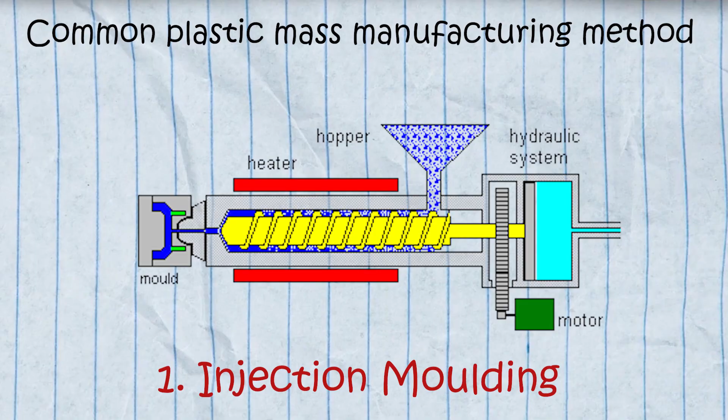Now if you look at plastics or polymers, on the other hand, the most common example you could give for plastic manufacturing would be injection molding. Study up on injection molding because you will be asked about this during your interviews. So study up, it's good to know. Another one would be blow molding. Thermoforming is also a pretty good thing to study because you might be asked about it too - I was personally asked about it. Other concepts such as rotational molding, and finally the most infamous one, additive manufacturing, aka 3D printing.

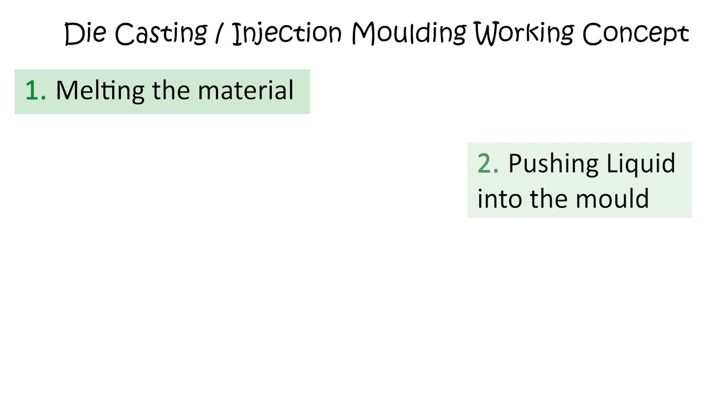Die casting versus injection molding. The concept of manufacturing is relatively the same here. You start off by melting a certain material and then pushing it inside a cavity or a mold using a piston or a high pressure pusher, and you fill the cavity up to a point where it's pressurized inside, and then you let it cool and solidify. Once it's cooled and solidified, you open up your mold and take the piece out - you just extract it using a plier, pull it out, if you may. And that's kind of the idea between die casting and injection molding.

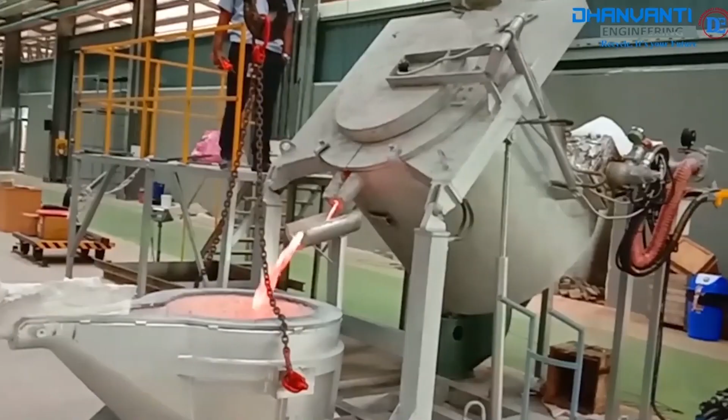So what is the difference then? The most obvious difference between both these manufacturing techniques is the material used. In die casting, you use metals, and in injection molding, you use plastics. In die casting, you take your solid metal, send it into a furnace, melt it out to get liquid, and then send it into your cavity to solidify. In injection molding, the idea is the same, but you have plastic pellets instead, which are first melted in a barrel, and then the liquid plastic is sent into a cavity, which is then solidified. So if you think about it from face value, the concept of manufacturing between die casting and injection molding is the same - it's just that the material used is different.

So I was asked this question during my first ever engineering interview for a full-time job. I remember the interviewer asked me this question. She said, 'What do you know about FMEA and DFMEA?' And I think I'd studied about it, but I blanked out when she asked me, and I had no idea what she was saying. It was very awkward and embarrassing, and I just looked at her face like, 'What the hell did you say to me?' Yeah, that was pretty embarrassing.

So what is FMEA? Failure modes and effect analysis. It's a systematic methodology commonly used in product development and manufacturing. Using FMEA, you can identify and analyze potential failures and proactively find solutions to it before it actually becomes a real thing and you lose a lot of money.

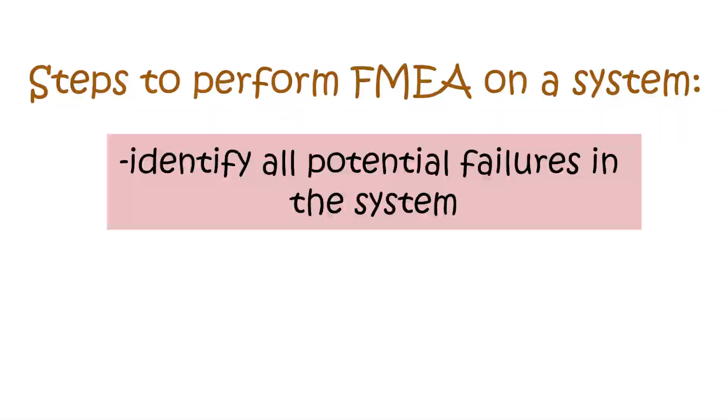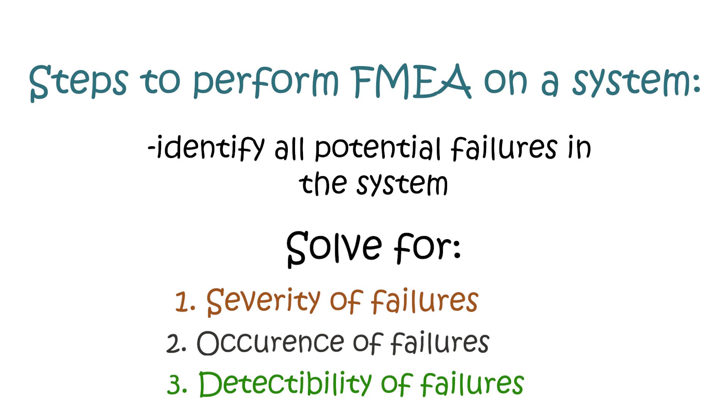So let's say you were tasked to do an FMEA analysis on a specific system. The first thing you would do is identify all potential failures in that system. Once you find that, you solve with 3 metrics. The first one is severity, how severe the failure is. The second one is occurrence, how commonly this failure occurs. And the third one is detectability. You give it a rating from 1 to 10 for each of these metrics.

Once you solve for the ratings, you multiply all 3 values. The result of this multiplication is called the risk priority number. Once you get the risk priority number for each of these failures, you sort them from smallest to highest values, and find out which one has the highest RPN - that would be the highest risk - versus the ones with the lowest values, which would be the lowest risk. Sound simple? It's not too bad. Just study some more about it and you should be fine. Failure modes and effect analysis.

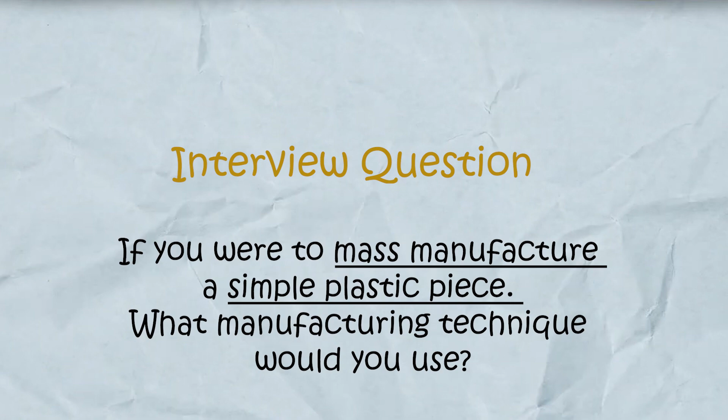So if I were to mass manufacture a plastic product, what manufacturing technique would it be? Well, injection molding, right? It's the most commonly used manufacturing technique for mass producing a plastic product.

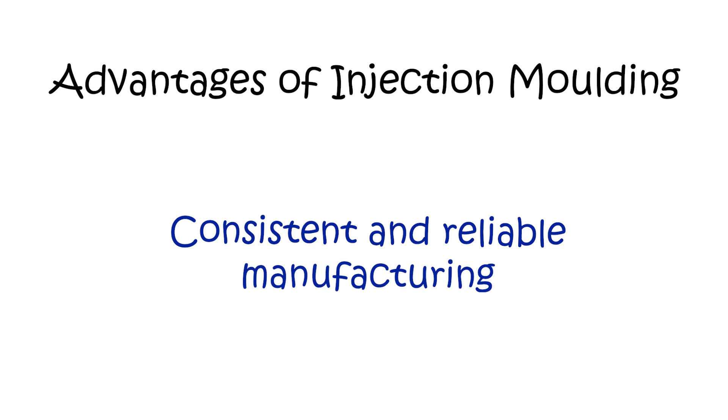Some of the advantages of using injection molding are that it's highly precise in terms of the products it creates. Its mass production is very consistent, producing consistent parts over time. It's very versatile, letting you create various designs. And you've got a plethora of materials to pick from in terms of plastics and polymers.

You can automate it, so you don't have to sit next to it constantly. And finally, economies of scale: the more you produce, the cheaper your manufacturing gets, so that's great too.

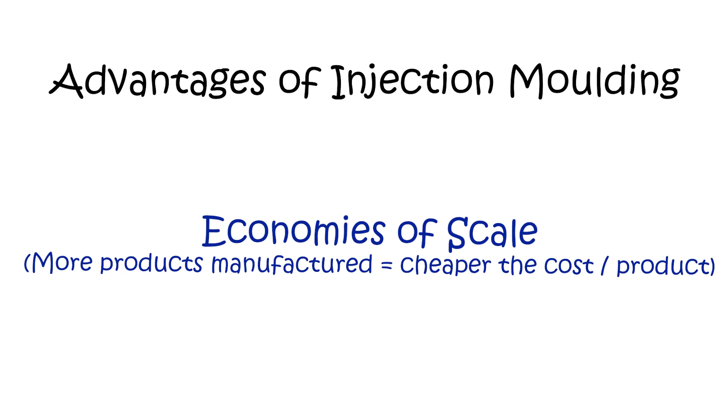How to design a part for better injection molding? Some of the more common problems faced during the injection molding operation are air traps inside the mold itself, drag marks, burn marks, sinking, and warping. These are things you experience or notice during your initial injection molding operation.

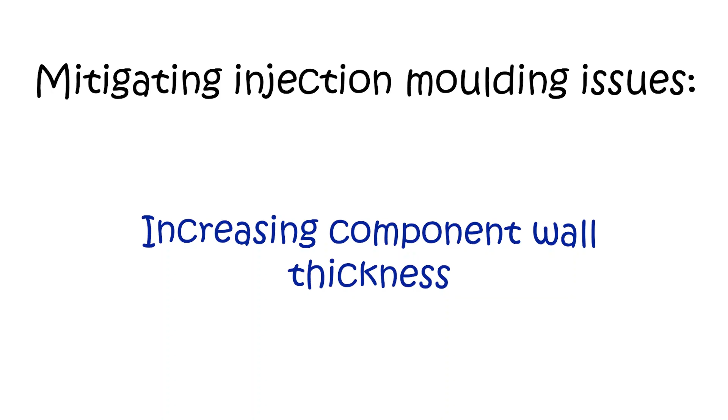How do I approach the design? Some of the basic things to look at would be, first, increasing your wall thickness. Having a thicker wall helps mitigate the shrinkage that might occur during the cooling process of the object itself.

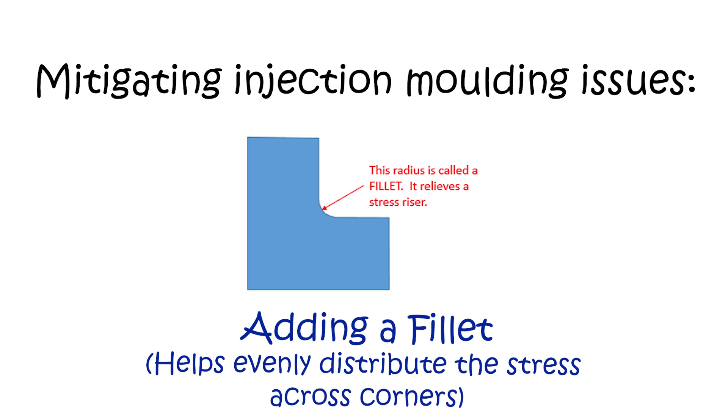The second thing would be adding a fillet. A fillet actually evenly distributes the stress across the corner of your object, which helps. Adding a rib would help make the corner of your object more sturdy.

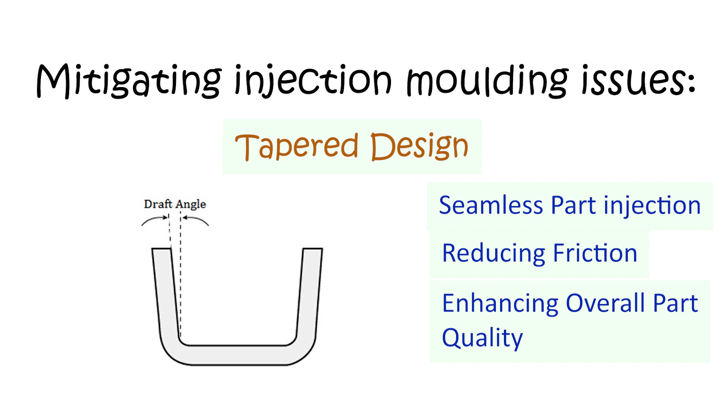That's great. Adding a tapered design, such as a draft angle, to an injection molded part can be useful for various reasons, such as improving part ejection, reducing friction during demolding, or simply enhancing overall part quality. And finally, better material selection—having a material that doesn't succumb to problems you might face in your injection molding operation is preferred. So that would be the initial design considerations I'd make when developing a product for injection molding.

Some key factors I look at when picking a material for a product: first, what is the functional requirement of that material with respect to the component I build? I look at mechanical properties like electrical and thermal conductivity, wear resistance, structural rigidity, and durability, to assess if this material would work well for the component I intend on building.

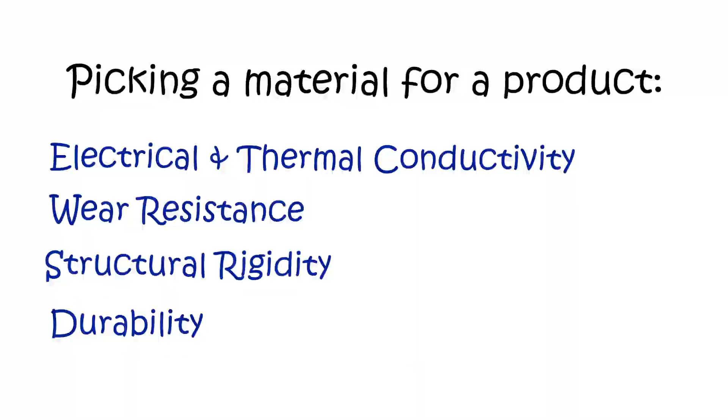The next thing I look at is cost. Everything has to be within a budget, right? So cost would include cost of raw material, cost of assembling the product, and cost of machining it. All of that comes under cost.

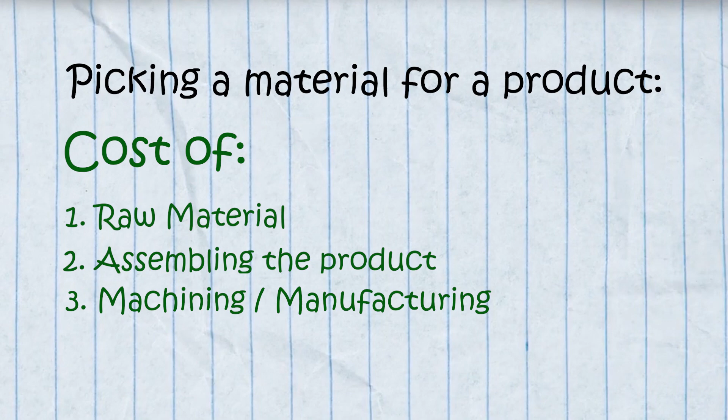The third one is ease of manufacturing and assembly. If a material was easier to manufacture, it would be highly preferred over one that wasn't, because it's easier to work with, reduces the complexity of manufacturing, and is cheaper too.

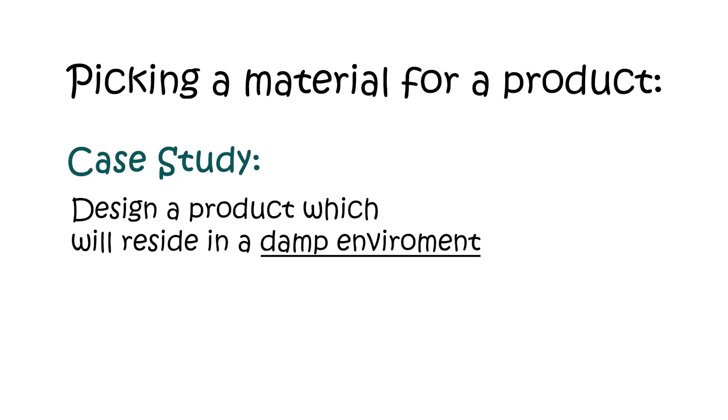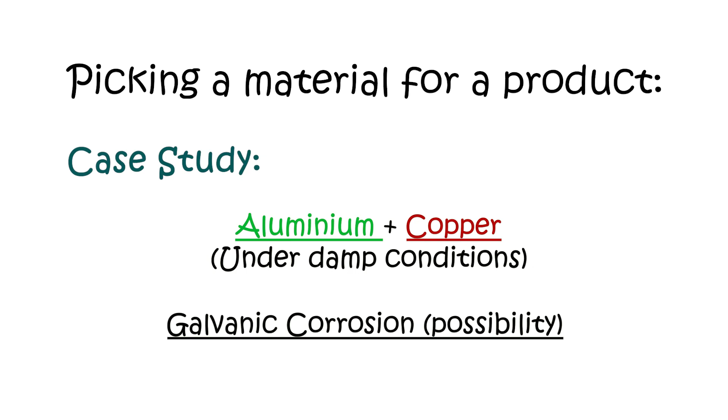And finally, compatibility with other materials. Let's say you were asked to develop a product situated in a damp environment, where one part is made out of aluminum and another out of copper. If both got in contact with each other, chances of galvanic corrosion could be highly likely, which could ultimately affect the structural integrity of the entire product. That would be a bad idea, right? If you look at all these points together, I think that's a good starting point to answer this question. So yeah, that's how I would approach it.

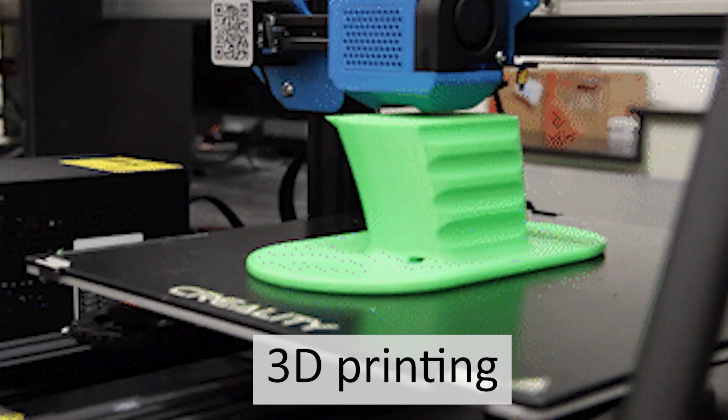My favorite manufacturing technique would be 3D printing, simply because I've used it quite extensively during my time at university, via design teams or just my own personal projects.

Some of the advantages of 3D printing are design flexibility—you get a chance to basically design anything you want within a certain volumetric dimension, of course. It's also very cost effective in terms of rapid prototyping and reduced material waste.

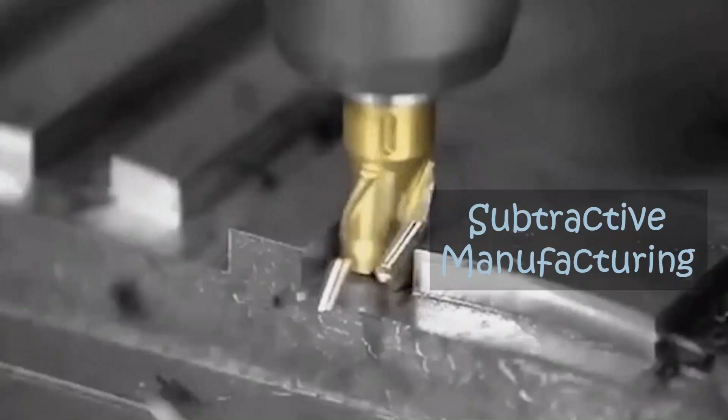If you compare 3D printing with subtractive manufacturing, where you have a milling machine and chip away bits of a block, you're wasting a lot of material by chipping it away. Whereas in 3D printing, you're basically adding material layer by layer, which saves a lot of material in the end.

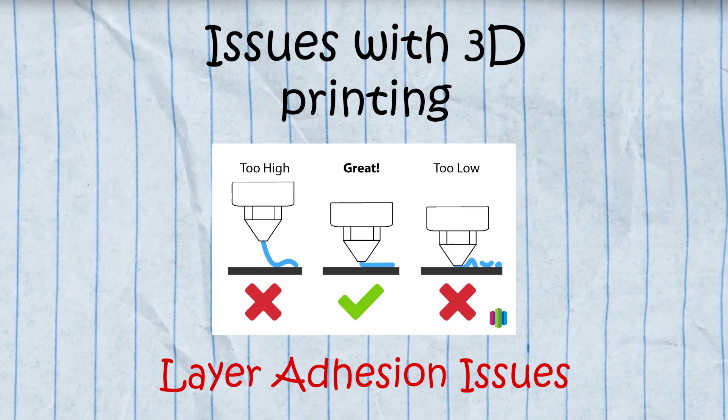Some of the shortcomings of 3D printing manufacturing are layer adhesion issues, which ultimately lead to some wastage of material, warping or curling, stringing, or just the ginormous time it takes to complete your 3D print.

To summarize, we started by talking about manufacturing techniques for metals and polymers. We spoke about FMEA, die casting, injection molding, and a bit of 3D printing. However, if I were applying for a manufacturing engineering position at a company, I'd dig a little deeper into the manufacturing techniques used to build metals and polymer-based products.

I'd also try to learn as much as I can about the manufacturing techniques employed by the company themselves to build their own products. For example, if I was applying for a battery manufacturing engineering position, I'd try to learn about roll-to-roll formation, cell sealing, electrode assembly, or battery pack assembly, stuff like that. Learn as much as you can about how the company manufactures their own products, and I think you'll be able to kill the interview.